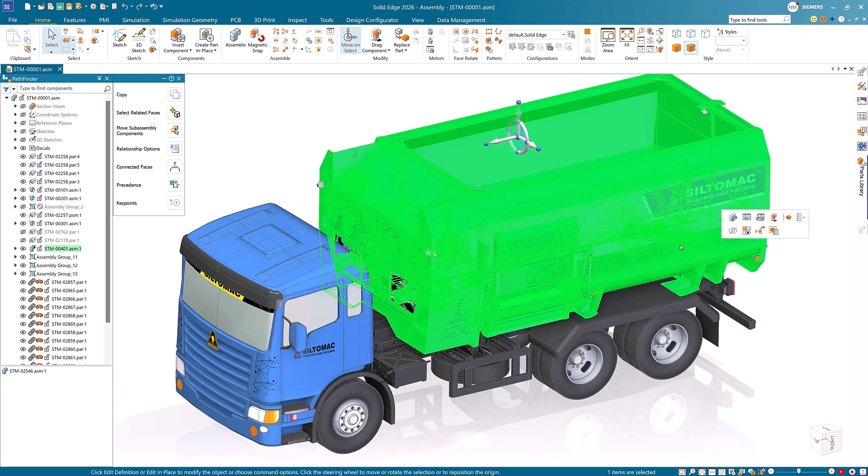Design clearly and confidently at any scale with Designcenter Solid Edge. With significant improvements for part and assembly workflows, managing complex assemblies just got easier.

Let's start with magnetic snap assembly. This new artificial intelligence-powered command automatically identifies and assigns the right mates based on nearby surfaces or edges. This eliminates the need to manually assign constraints, as Designcenter Solid Edge intelligently recognizes the correct relationships as you drag parts into place, making assembly creation faster and more intuitive.

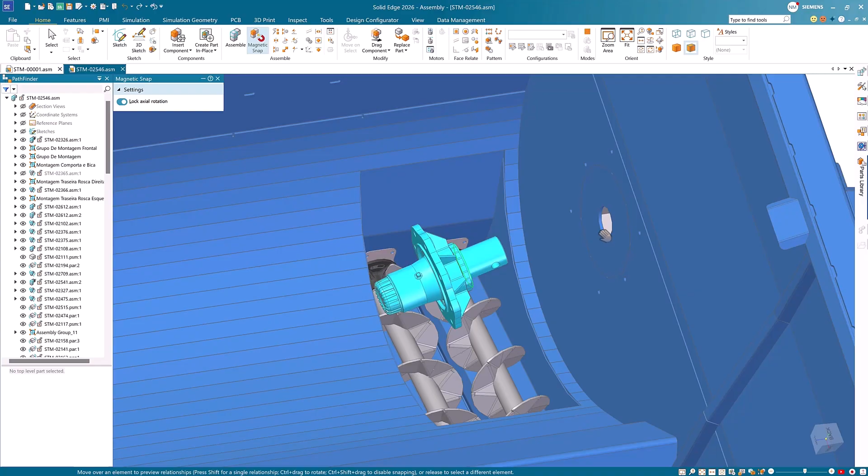In this example, we're missing an auger and its base. As we bring in these components, we'll use magnetic snap assembly instead of flash fit. Dragging the edge of the base to the hole automatically applies both a planar and an axial constraint in just one move. We can then bring in the auger subassembly and constrain it in the same way with a single drag and snap motion.

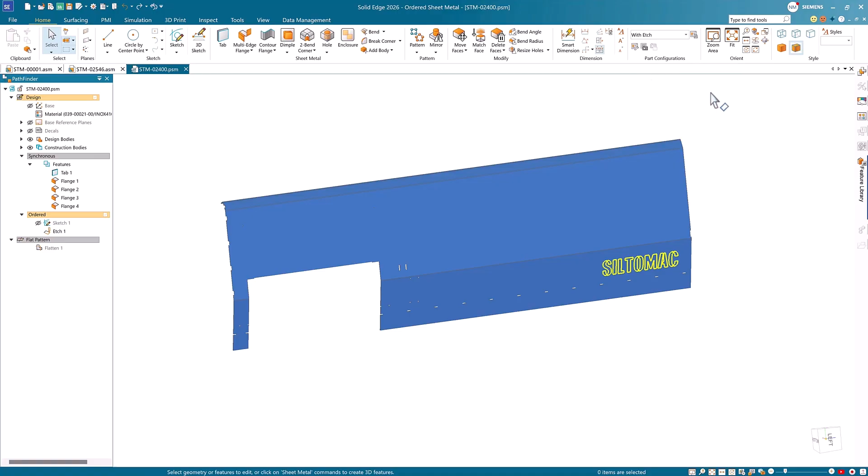Part display configurations are more powerful than ever. You can create multiple visual variations of parts and assemblies customized for different needs within a single document without duplicating files. Here we have 3 configurations: one showing just the etch, one showing just the sketch, and one with a decal added. Toggle elements on and off to build new configurations with just a few clicks, all without altering geometry.

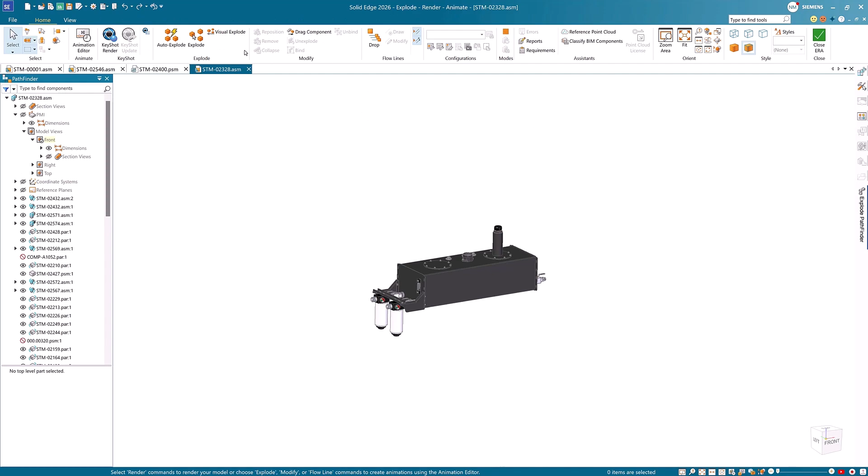The improved visual explode command brings new clarity to design communication. Exploded views can now be saved as display configurations, so once you build it, you can reuse it anywhere, whether that's for documentation, presentations, or just clearer communication with your team. It's a cleaner way to show how parts come together or come apart without having to redo the work each time. You can also select a specific part display configuration for the entire assembly.

For this side panel, we'll switch the default configuration to the one with a decal.

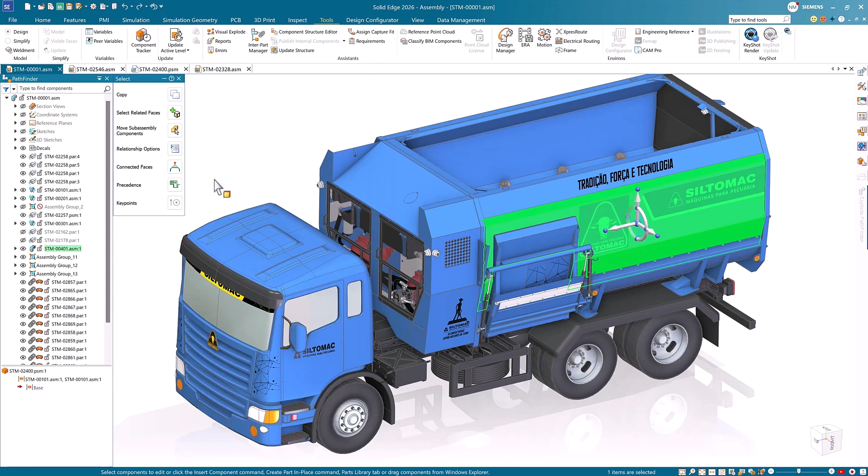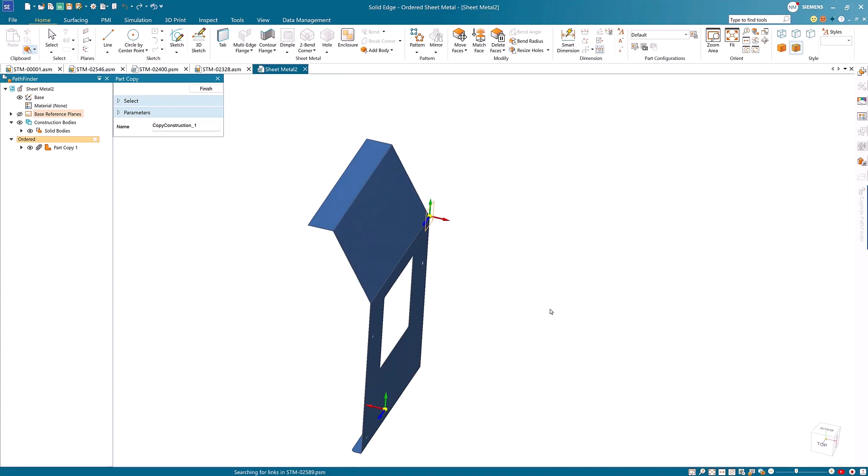With enhanced part copy, you can include geometric elements such as coordinate systems, sketches, and reference planes in your part copies. In this assembly, we're missing a side panel. Instead of starting from scratch, we'll create a mirrored part copy of the existing panel on the right. As we do this, we can capture the coordinate systems, sketches, and reference planes while copying the panel as a construction body.

Once created, we can save this mirrored part copy and bring it into the main assembly. By activating the reference coordinate system of the part it will attach to, we can then use match coordinate systems to assemble the new part directly in place. Part copies are associative, so when the original part changes, the copy updates automatically as well, maintaining specified parameters and keeping everything aligned.

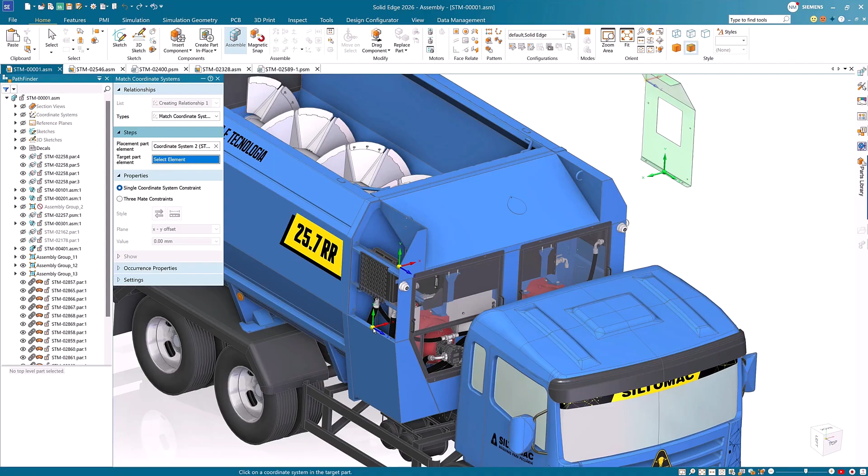Designcenter Solid Edge delivers greater flexibility and control, helping you work faster and more effectively from concept to completion. With intelligent automation, improved visualization, and stronger reuse capabilities, you can focus more on innovation and less on the process.